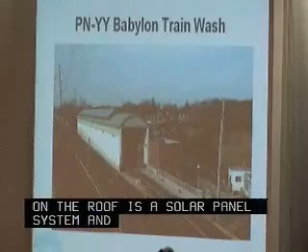The system was designed to clean both diesel and electric fleet. Mounted on the roof is a 35 kW solar panel system which generates electricity to support the house power needs. Exterior lighting and CCTV cameras are providing added safety and security around the perimeter of the facility.

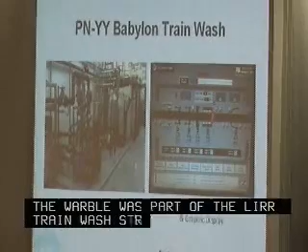The wash was part of a Long Island Railroad train wash strategy that began in 1990 and represents a third generation of automated wash systems on the railroad. The prior two washes put in service in 1998 and 2002 are running and have experienced no downtime to date.

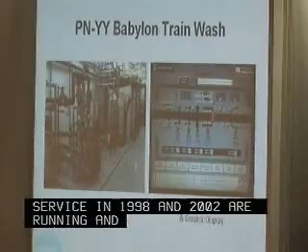The train washes were designed to ensure reliability, serviceability, and longevity. All equipment is accessible. Standard-sized duplex pumping systems were installed to reduce wear and tear and to avoid downtime during service. Exposed surfaces in the wash plant areas are corrosive resistant.

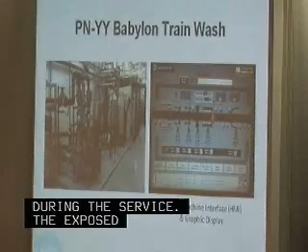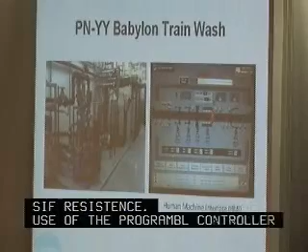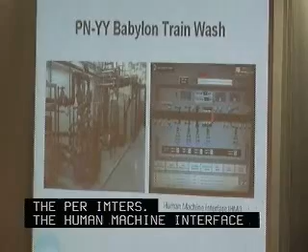The wash is fully automated and no longer requires a full-time operator. Use of the programmable logic controllers allows maintenance equipment personnel to adjust parameters that affect system performance and efficiency. The human-machine interface, the graphic display shown here on the right, provides the automatic and bypass manual control of the wash system with full status indication.

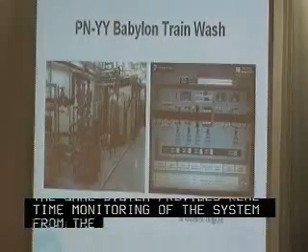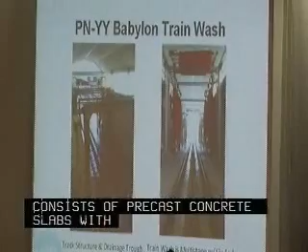This same system provides real-time monitoring of the system from our centralized maintenance facility. The track structure shown consists of precast concrete slabs with direct fixation rail. The drainage trough in the center is utilized to collect and direct water to the plant where it is either recycled or processed prior to disposal.

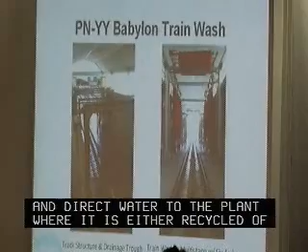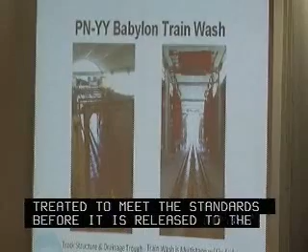Wash water that is not recycled passes through numerous filters and is properly treated to meet strict standards before it's released to the local system. The wash is a multi-stage system with 5 arches: a detergent arch, a brush arch, high-pressure arch, rinse arch, and water strippers to eliminate streaks on windows before it leaves the wash.

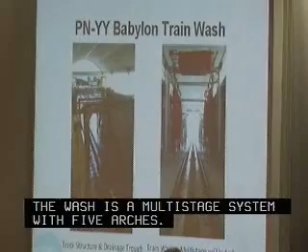This photo on the left shows one of our M7s after it has passed through the detergent arch and the brush arch. On the right is a photo of the M7 as it passes through the high-pressure rinse arch. During this stage, a deluge of water is applied to the equipment.

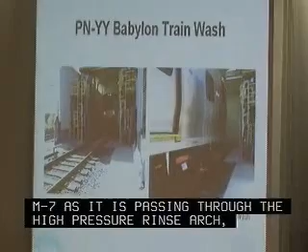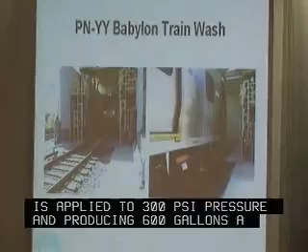Water is applied at 300 psi pressure, producing 600 gallons a minute before it is removed from the surfaces. The strippers are 7.5 horsepower blowers, each delivering 3,000 CFM of air pressure. And that is the end of the presentation.

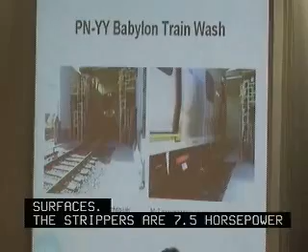It's good, Rich, thank you very much. Again, I want to say we were very pleased with that project, with the ability to use the ARRA funds and to come in on schedule and on budget. And that really concludes our presentation.

Any questions for Helena? Jonathan? One small question, thank you. The jobs created number that you cited, that was construction jobs? Construction jobs. Charles?

Let me use Hicksville, which you and I have discussed, as an example of the escalator situation. Have you given any thought to providing at least a meager inventory of parts which are used across the system, or through much of the system, so we don't have escalators down for months on end?

Yes, in fact we are. As you probably recall, we're putting a whole new unit together. We've transferred it to our station operations. We've recruited qualified escalator inspectors to be on our own staff to supervise the contractor, and we're developing an inventory. For example, some of the basics like comb plates, we need to have those in our own inventory and readily available for upgrades. So we're moving toward a very different operation. We will have an inventory of parts, and more up-to-date inspections, even as we move forward to replace the equipment. Thank you.

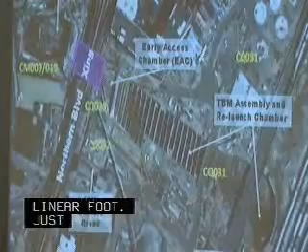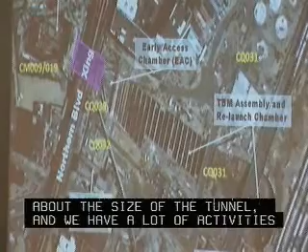Just to get a sense, this is what we refer to as the Q-tip. Right there is Northern Boulevard. The pink area is the crossing, that's about the size of that tunnel. We have a lot of activities going on at the same time, with 4 major contracts operating in this particular area.

The mining process you'll see right now, I'm just showing you the overlay of where the tunnel is. For Drift 2, we are at 88 feet, and Drift 1, 48 feet. We expect... go on.

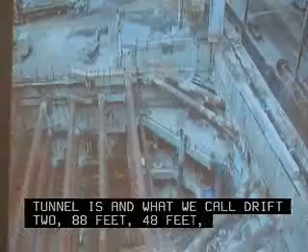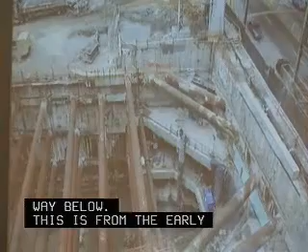The excavation is done way below. This is from the early access chamber. Northern Boulevard is right there with the elevator on top. And this gives you a cross-section of what we're doing.

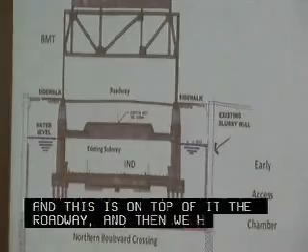We have the existing IND subway that we are looking at, and on top of it is the roadway, and then we have the foundation of the elevated structure with piles going all the way down, and Northern Boulevard crossing is just under it.

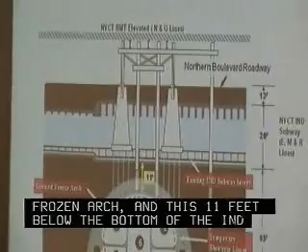To do that, we had to create a frozen arch, 11 feet below the bottom of the IND tunnel. This is the E, M, and R lines. The F peels off before that. And in addition to that, we had to support the

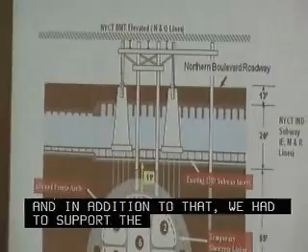elevated line separately to make sure it will not create any settlements during construction. We expect to dig into 7 different drifts that we're going to take out. What you saw in the prior one was 1 and 2, the upper left and upper right.

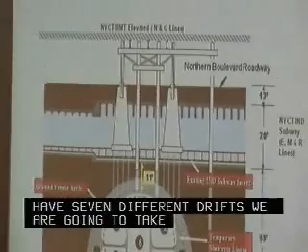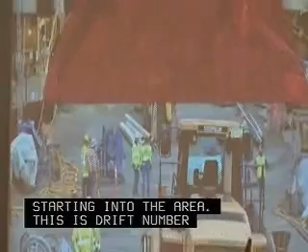I'm just going to try to show you some of the work being done right now in drift 1 and 2, to get a picture to understand how complex that is.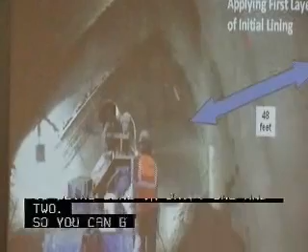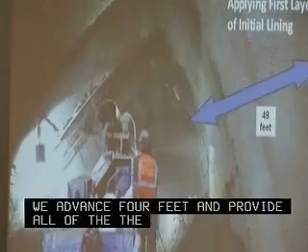This is drift number 1. We are now at 48 feet. Most of the excavation is done manually. This is clay, and we support it. We advance 4 feet, we provide all the structural support. It's temporary structural support; there will later on be a final one. And we continue to move on.

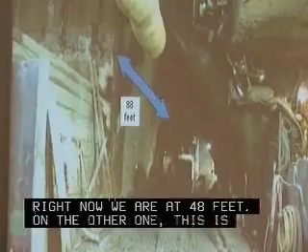Right now we are at 48 feet on the other one, and this is drift number 2. We are at 88 feet out of 120, so we have about 32 feet to go until we hit the other side.

I just wanted to... No, we're putting in reinforcement, and then we shotcrete. And then later on, we're going to come in and do the final. We're going to do 1, 2, then 3, 4.

So we're going to go down on each side, then start from the upper drift - that will be 5, 6, and 7. Very, very risky, in the sense that we have to make sure the tunnels and subways do not move, and we're going to support the piles of the elevated structure when it's done. For the moment, we are allowing the piles to stay, and as we provide the final support, we will then resupport them.

Right now, the whole thing is frozen. Actually, we were supposed to have a 6-foot frozen arch. It turns out that a lot of the dirt below that is frozen. It's primarily clay, in layers. So we also still have water that we have to deal with.

Yes, it is wet. I was inside there to look at that, so you can see the layers. It's almost a great lesson for anyone studying geotechnical engineering.

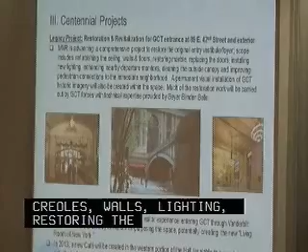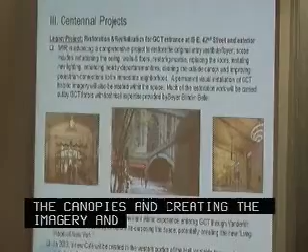We've taken this opportunity to create a complete restoration process: ceiling, walls, floors, new lighting, restoring the marble, new doors, enhancing departure monitors that are nearby, cleaning outside canopies, and actually creating a permanent visual installation of GCT historic imagery so travelers can get a sense of the history of the terminal when they come into that space. We are performing the work with in-house forces, with technical expertise provided by Beyer Blinder Belle, the architectural preservation firm that assisted in the 1990s restoration of the terminal.

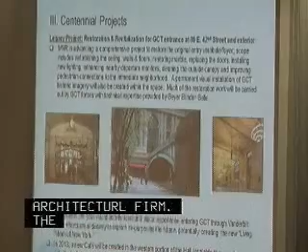The second centennial project is the Vanderbilt Hall repurposing, shown on the extreme right, the former main waiting room, which we now call Vanderbilt Hall, really has a mixed set of experiences for the public. At times we have active exhibits in there that are inviting and enticing, and at other times it's empty. We'd like to create a more consistent visitor experience.

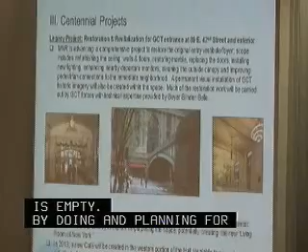By planning for a potential multimedia digital platform, we're looking at a more standardized way to have default exhibits and other activities ongoing when major commercial exhibits are not present. That multimedia platform will also support Arts for Transit programming and other venues, so that, again, the experience is bright, cheerful, and inviting when you come in from 42nd Street.

We are doing an RFP for a firm to assist with that. Although it's not funded, we're going to look at the business case to see if these additional activities will actually provide the funding to make this work.

Additionally, the other thing to activate Vanderbilt Hall, we're working with the MTA Real Estate Department in launching a new cafe. An RFP for that offering will be issued in the next week or so, and it'll be in the western portion of the hall, and will again achieve the goals of having a steady presence in Vanderbilt Hall.

Other activities that are underway really center around four themes for the Centennial: the history, its status as a landmark, parade of historic trains, where we're going to actually bring back relevant historic railroad equipment for visitors and children to see—there are folks today who have never seen a sleeping car or a dining car—and the last exhibit, the future of Grand Central, with a heavy focus on East Side Access. There'll be many sub-events that will focus around those themes. Some advance events you'll see immediately.

Coming up this July, the Transit Museum will be having its centennial-themed Kodak Colorama exhibition in their gallery. The Holiday Train Show will be coming up November and December, and the Holiday Fair will also be centennial-themed this year. There are many other plans and developments underway, with details in your book.